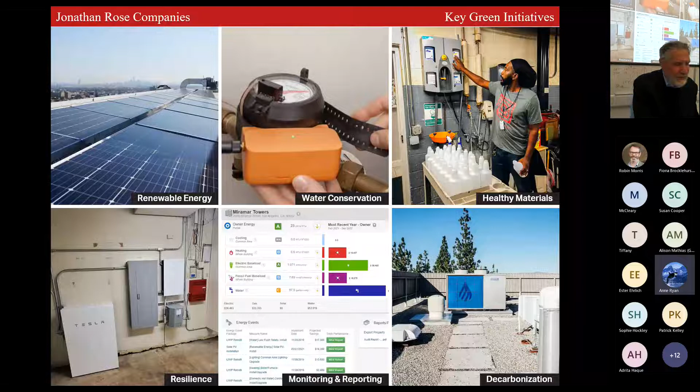And decarbonization—this happens to be a project, one of the first in California, of removing existing fossil fuel powered equipment and replacing it with electric.

Okay, so I'm going to describe three projects: Via Verde, Sendero Verde, and an acquisition rehab.

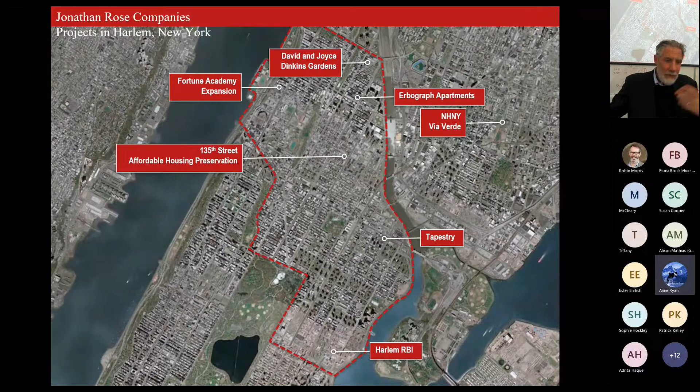By the way, over time, through a series of affordable housing programs, it's entirely filled—there's no vacant land left. And that took 25 years, showing the importance of consistent government commitment to regeneration. Mayor after mayor all consistently worked to rebuild this neighborhood. We, as a company, have done work in this area, so we are familiar with it.

It's very well served by buses and subways, good transportation access. It's a long triangular, skinny site, so it's very difficult to redevelop. With the rest of the South Bronx being built, this one kind of got left behind.

So a group of architects and not-for-profits convinced the city to put out an RFP, saying since you don't really care about this site that much anyway, why don't you put out a challenge for somebody to build really green, new affordable housing?

Now, at the time, the culture of affordable housing was very distant from the culture of environment. There was this belief that any penny spent more to make a building green would be a penny less spent on affordable housing.

I used to be told that back then, America built 100,000 new affordable housing units a year, which is very low—today we only build 50,000 a year. But people would say to me, if you raise the cost of housing with your stupid green ideas by 1%, we'll only build 99,000 units instead of 100,000, and there'll be 1,000 homeless families and they'll all be your fault. That's what people used to say to me.

So I had to learn how to build green buildings without spending a penny more than the normal budget, which was a very, very good discipline.

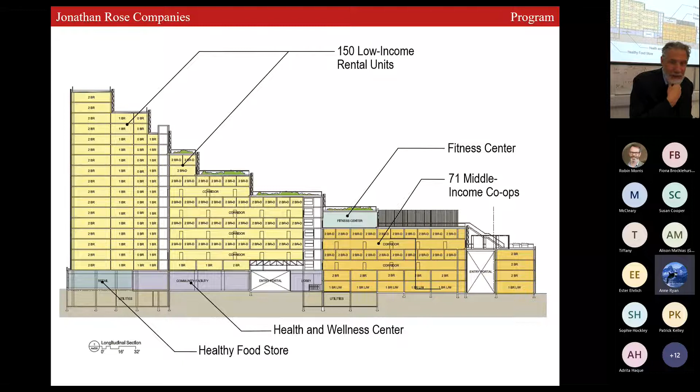The left side of the building, the taller part, has 150 units of low income rental housing. On the right are 71 middle income co-ops. We really believe in mixed income.

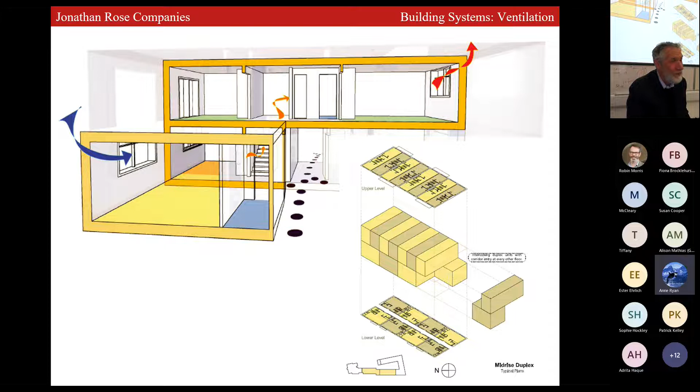So this is the cross ventilation strategy: every unit has a living room, dining room, and kitchen on the ground floor, then a stair that goes up and connects on the second floor to two bedrooms, bathrooms, and laundry machines. When you fit these pieces together like a jigsaw, you get a corridor on every other floor, so you actually have more floor space dedicated to living versus circulation—and as I said, you get cross ventilation.

And remember I was talking about creating models for systems change—when this building opened, it was on the front page of the New York Times. It won all these global awards from all over the world, including the Royal Institute of British Architects in the UK.

And it woke people up to the idea that affordable housing could and should be green, and that it could and should be attractive. So after Via Verde we're seeing all kinds of design competitions, and the idea that affordable housing is a long-term commitment to a neighborhood and could really make a positive impact if it was well designed. Previous to this, essentially most affordable housing design, the question was, how cheap can you make it?

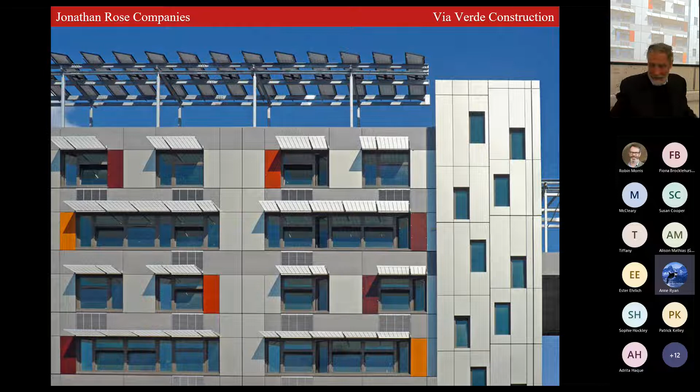Amongst the strategies, first we're using passive sunshades. This is a very thick, prefabricated, insulated facade, and you see solar on the roof. On the right-hand side, that's a stair tower, and because we made the buildings thinner, normally stair towers are in the center. We brought it out to the facade to encourage people to walk. This is also a building that launched the fit building movement, the idea of active design, that a building could encourage more exercise and activity.

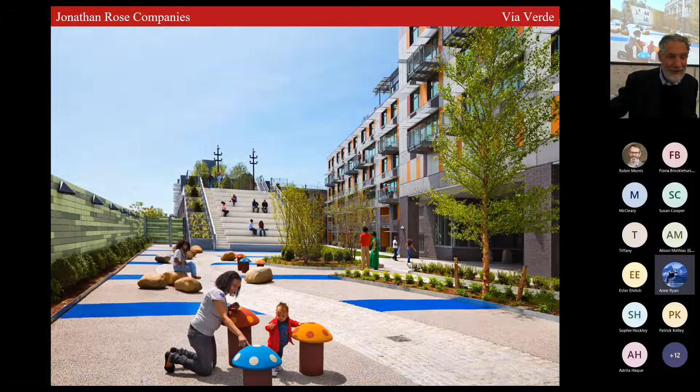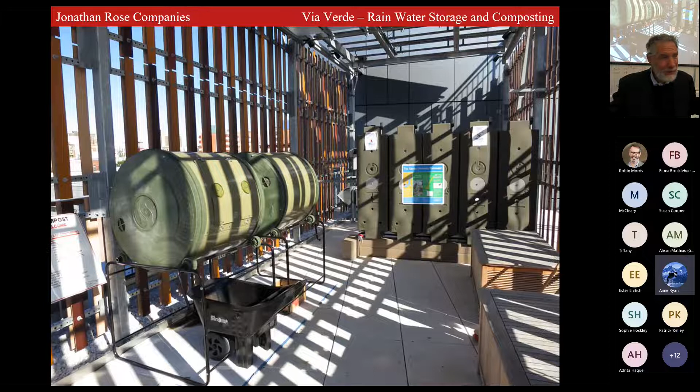Here's a view of the cascading roofs from the top. We actually saved these stones from the excavation and put them at the entrance. Starting at the bottom level, there's a children's play area, then an amphitheater, and above that an orchard where we grow apples and pears, and above that a series of community gardens. Those are fed by, on the right, a system that captures rainwater and purifies it, and on the left, composting. Above that is an exercise room. Often in affordable housing, if they had an exercise room it would be in the basement somewhere. This is filled with light. We're trying to encourage people.

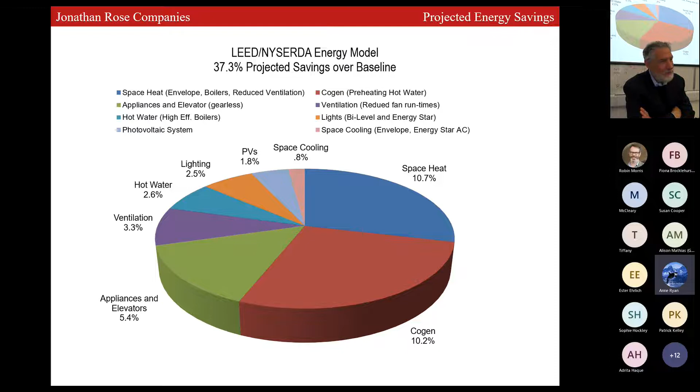Just a sense of, we're achieving 37% reduction over a normal affordable housing building in this location. This shows where the savings come from: more efficient elevators, ventilation, hot water, lighting, PV. Space heating and cogeneration are big pieces of it, but it takes all these elements to really add up to energy efficiency. I think sometimes we over-anchor on things like photovoltaics or one particular strategy. The point is we need all of them.

10 years later, we started a project called Sendero Verde, which is the largest passive house project in the United States. This is in East Harlem. It's about 700 units of mixed income housing, serving families from formerly homeless to middle income. We designed it as a passive house project. It's the largest passive house project in the world outside of Europe right now.

Everything that's green is passive house. The blue is energy efficient, but not passive house. On the right side, it's a charter school, a 50,000 square foot middle school. On the left side, a whole series of community serving spaces for a variety of reasons. There's about 12,000 square feet of after-school programs, social lunches and meals for seniors, social service programs, a health center, all that.

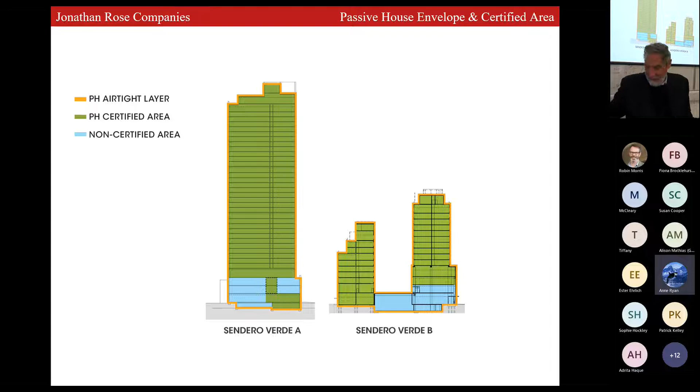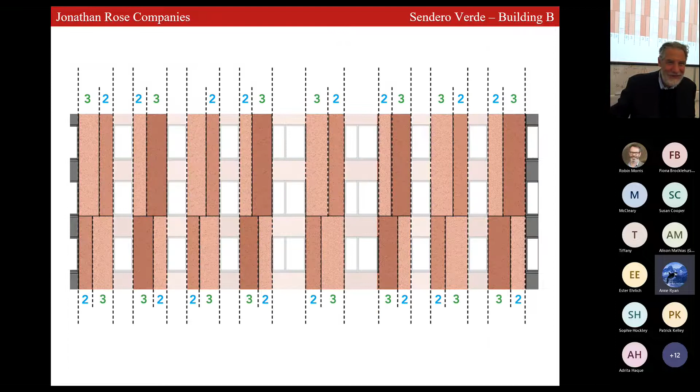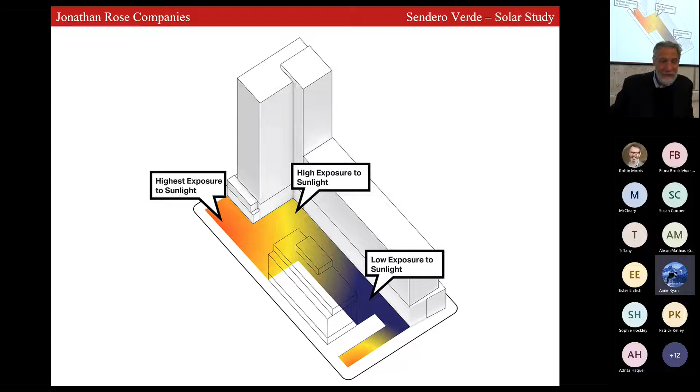One of the interesting things is how you seal in between those. The other thing is I try to have all our projects designed to Fibonacci proportions so they have an innate sense of connection with nature. This is how the proportions lay both vertically and horizontally through the building. In the middle is this courtyard, which does two things: it follows the path of an old Lenape Indian trail, and we designed it to bring sunlight into the center of the building. All of our buildings we design with a sun model, and then we're following that path of light.

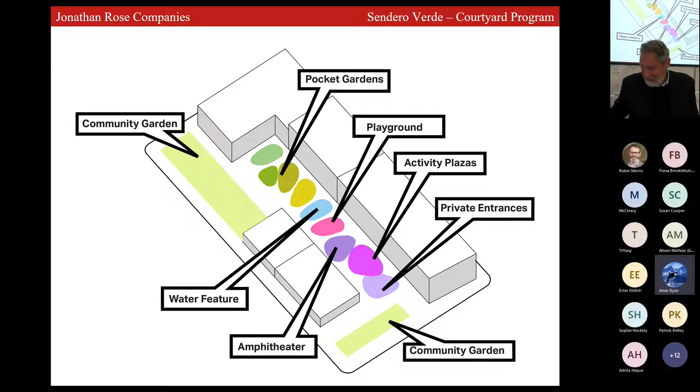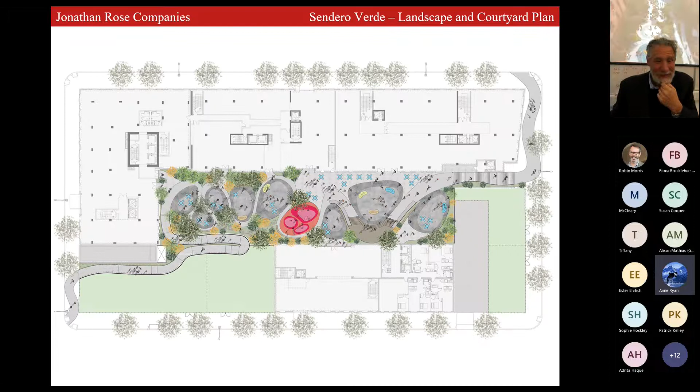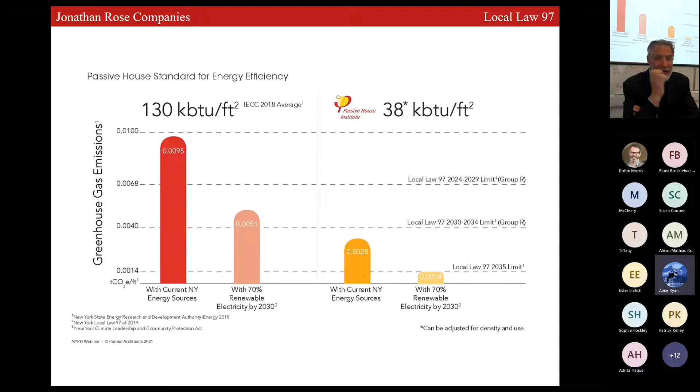Just to give a sense of passive house, the typical building in New York City with current sources is consuming 130 kBTUs per square foot a year. This building, passive house, requires that you go at 38 kBTUs, and we're even less.

I want to show you, I think there's some engineering geeks in the room or on the Zoom, so I want to show you some of this, how. It takes super duper attention to insulation and to isolation. So when it gets really cold or really hot outside, we want barriers.

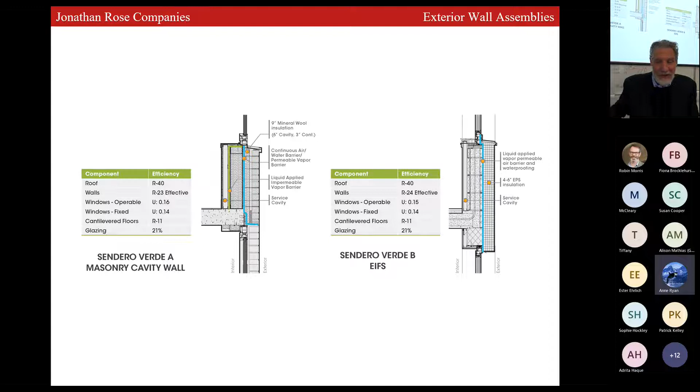You'll see, by the way, it says 21% glazing. Although our goal is to have a lot of light in the apartments, but not too much of the facade glazed, there's all triple glazed windows. The roof is R40 and the exterior walls are R24.

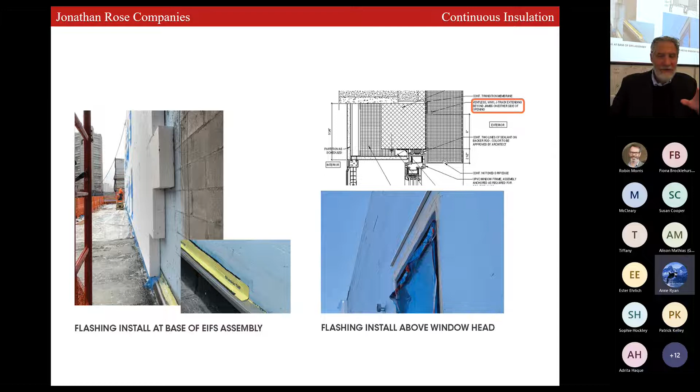This is the EIFS going in, and you also see those blue lines are all the sealing. So there's a tremendous amount of air sealing that's necessary to get rid of air infiltration. Every detail, so the way the flashing is done, is very carefully planned to stop thermal bridging.

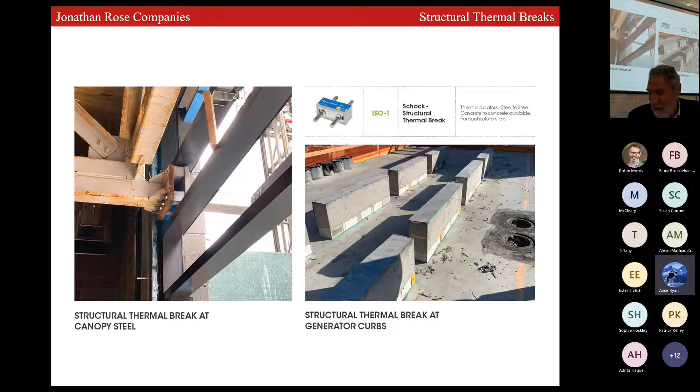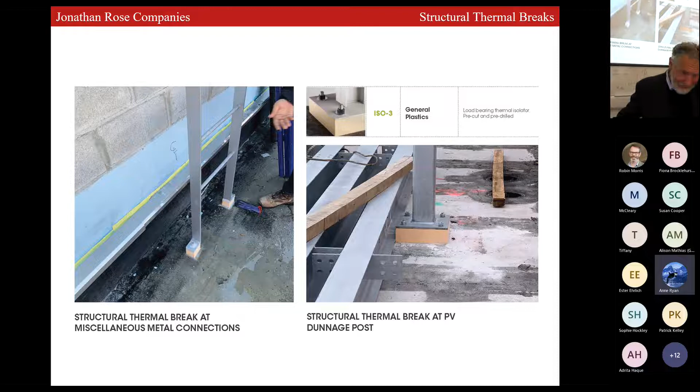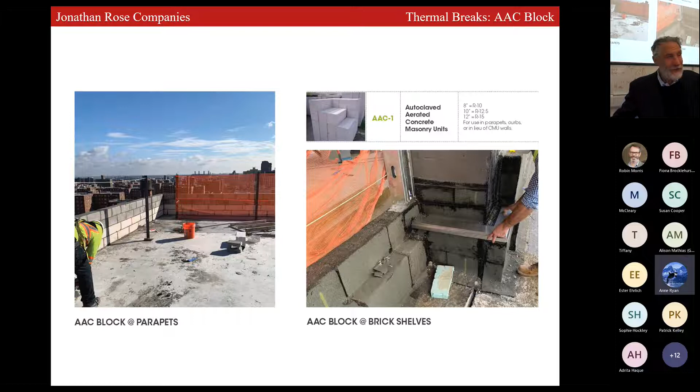Here again, this is anytime there's metal, the metal doesn't connect directly to the roof. In this case, that's a stair, you see it's got these little foam pads beneath it to form the thermal break. And we're using autoclaved aerated concrete masonry units, which are more insulating at the roof parapets.

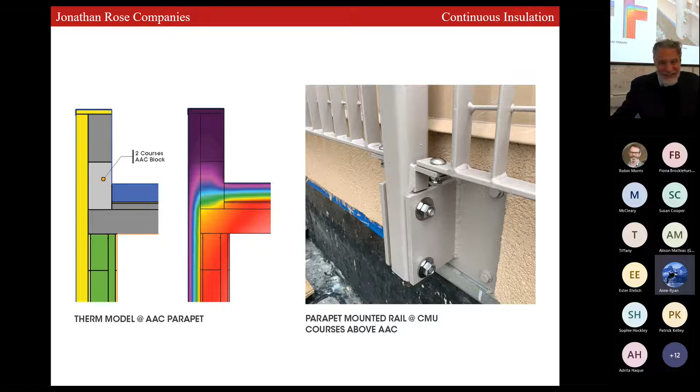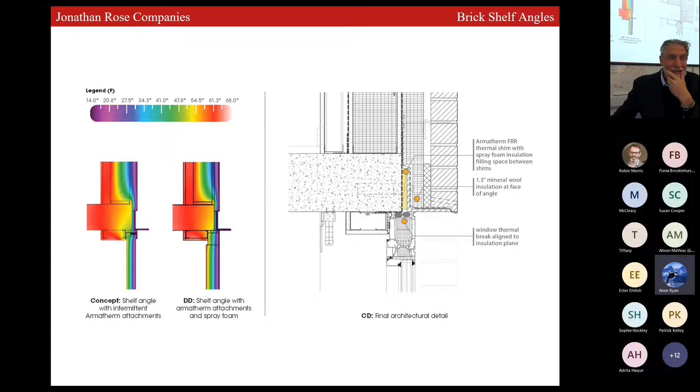This is just a thermal model to give you a sense of what happens when you create this barrier. You can see on the right image, the heat is kept inside and is not traveling and radiating to the outside, which is what normally happens in a lot of buildings. And again, the shelf angles that are holding the bricks, every single one of these details needs a thermal break and insulation to be able to get a building that is this energy efficient.

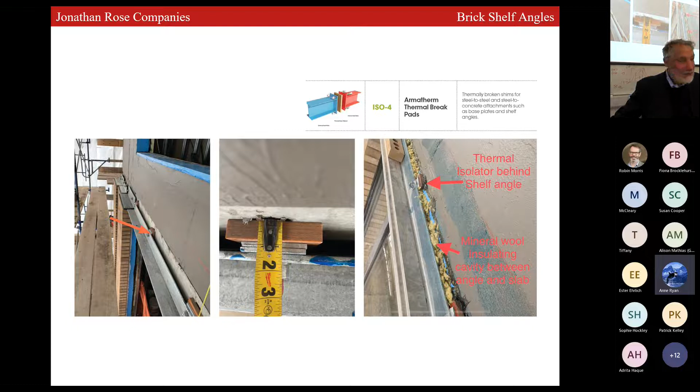The other thing is, by the way, these are all construction photos. It means that the architects, engineers, the owners, all have to monitor every bit of installation to make sure it's installed properly, because otherwise you'll have gaps and you won't achieve the goal.

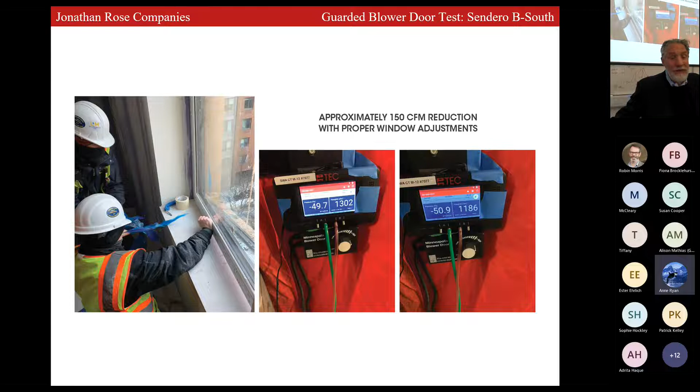It means then we do testing, and you see where this says proper window adjustment. Literally every apartment we do what's called a blower door test. We pressurize it, we check to see if there's leakage, and then we caulk or adjust or do whatever we have to do. So in many cases, we're using less expensive windows that we're then sealing on site. You can see, for example, on the left image, filling it with silicone caulk underneath the sill, and super sealing around the sill so that cold air can't blow in.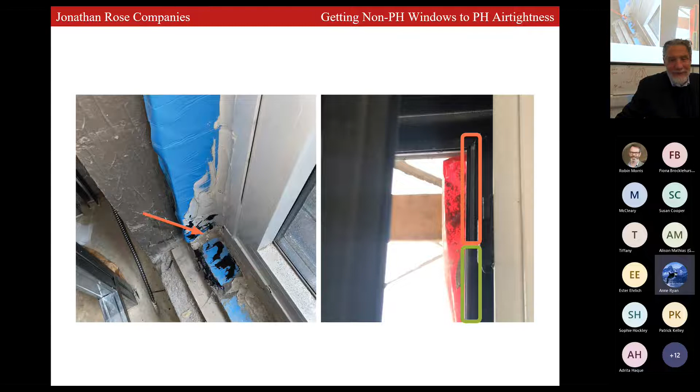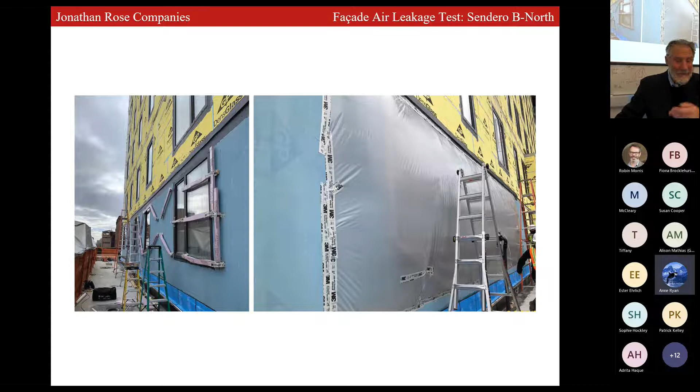So it comes down to a lot of details and then a lot of paying attention. This is actually the facade being tested with a blower, an effective blower test to make sure that it doesn't leak.

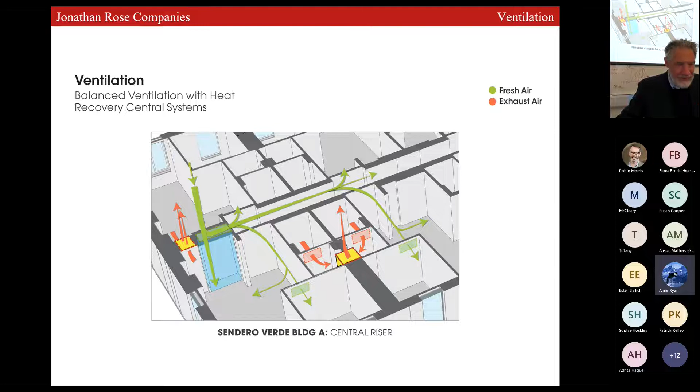Then at the same time, we have a heat recovery system. Very tight buildings need air circulation, otherwise they get sick building syndrome. So we're continually removing and bringing in fresh air, circulating it, and taking the heat and cool out of the exhausting air.

Then we have the whole heating and cooling system with something called VRF, variable refrigerant flow. It's not a heat pump, it's a different system. But every unit, every bedroom and living room, has one of these units that provide heating and cooling.

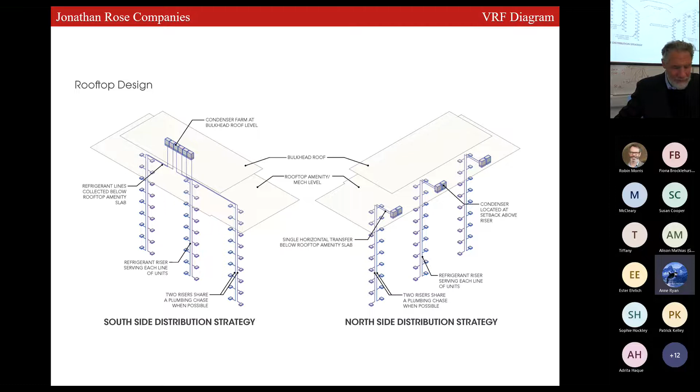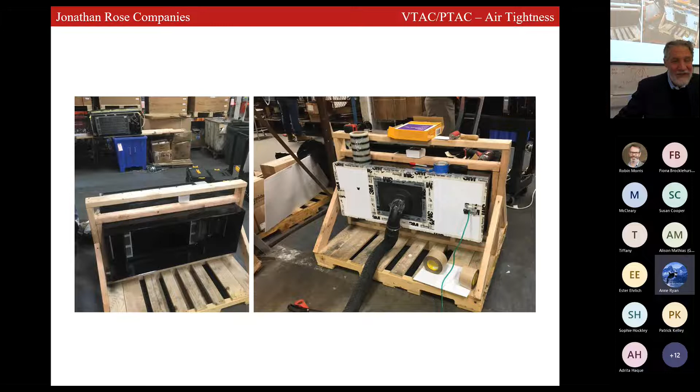Even those systems - if you've ever looked at an air conditioner or heater facing the outside, all kinds of cold air can blow through. It's very leaky. So we had to design whole sealing systems for those and test them for air tightness. Even here, that white line is insulation around the control wires going in, and you can see how we sealed around it. So it's these small details that lead to the big changes.

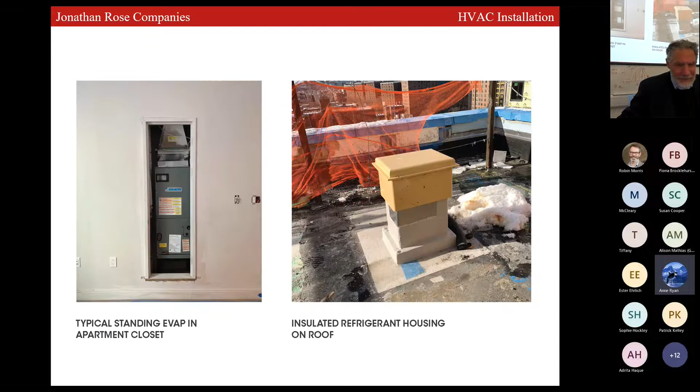Okay, so it's the same story over and over again. This is some of the equipment we're using: enthalpy wheel, vertical risers, horizontal distribution of air, fresh air on each floor. And that's what achieves this fantastic, significant reduction in energy use.

What this tells you is that we can use a lot less energy if we design right, if we design our details right, if we really pay attention, and it's permanent - it's the life of the building. This building will use significantly less energy and be more comfortable and more resilient. A building like this, if the power goes out in the middle of winter and the heat goes off, will only go down to about 58 degrees because it's such a good container of the heat that comes from the people and the sunlight during the day.

This costs today approximately 7% more than housing business as usual. But we think it's a societal investment. We all need to be investing in helping solve the climate, reducing our climate impacts. And it certainly is reducing energy bills for low-income families too. So we think it's really the right kind of investment society needs to be making.

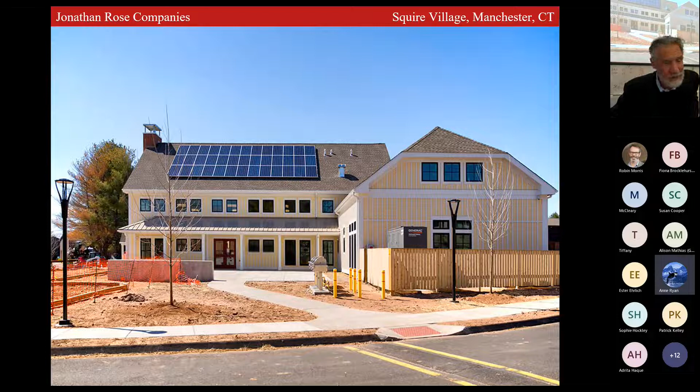We also built a $2 million community center for the residents that is almost passive house design and solar powered. And you'll see, actually, if you look, there's a generator on the lower right too. This becomes a community resilience center should there be a storm, knocks power out, etc. There were over 1,000 residents who lived on this site with no social services whatsoever.

So, a large gathering space. And then we build this in every single project: this health exam room, it costs like $8,000, a very simple thing to build. But this allows us then to partner with healthcare providers, they can be either public or private, to then come and meet with our residents and give them basic health services. And it's very cost efficient because if we have 1,000 residents and a resident service coordinator can make the appointments, it means when a healthcare agency comes, we can fill their schedule with meetings. And so it makes it worthwhile for them to make the trip.

We have our health providers recommend not only medicine, but diet and exercise. And so to do that, every one of our projects has to have a gym where people can exercise. We also organize things like walking clubs and other things to try and get people to exercise.

Unfortunately, in the United States, lower income people and even to some degree moderate income families cannot afford to eat. The incomes are just too low. And so we connect our residents with food banks, food shares, or things called mobile groceries, all kinds of ways to bring affordable, healthy food to our residents.